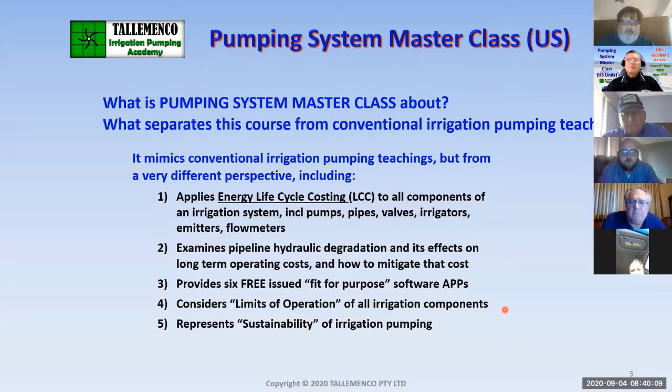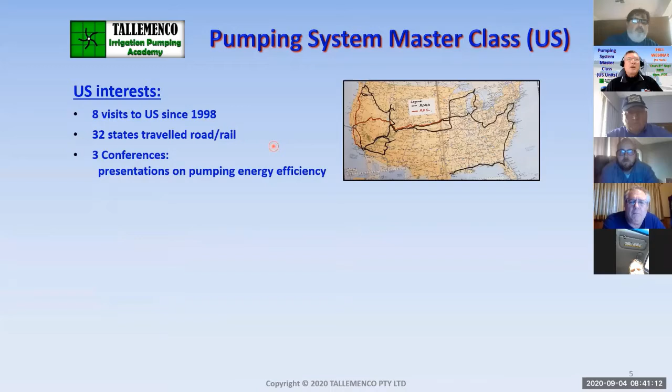I've been to the US 8 times since 1998, and I've also been to 3 conferences where I've presented papers on energy efficiency. First time in Seattle in 2017, and Long Beach, California, where I met Chris Wickman, and then last year in Vegas.

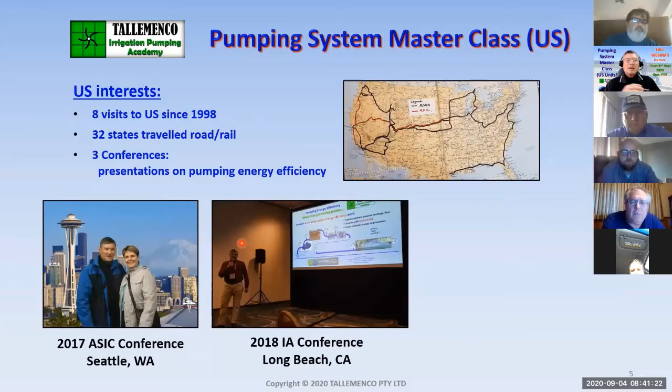What's my background? I have an associate diploma in mechanical engineering. I'm a certified irrigation agronomist, a certified irrigation auditor, landscape, and I have a certificate for training and assessment. I'm also HACCP certified, which is Hazard Analysis Critical Control Point for recycled water. I did a lot of recycled water in Queensland a few years back. And I live in Adelaide, South Australia.

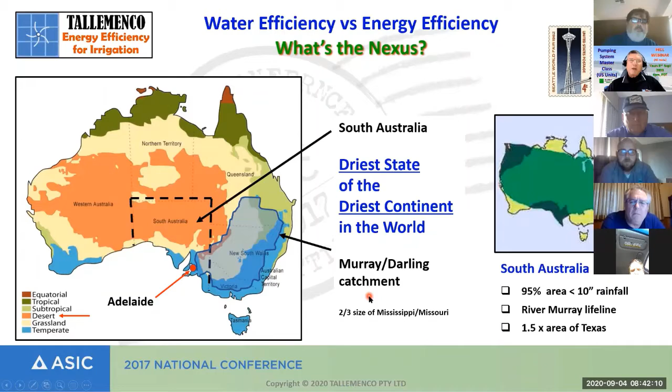Well, there's Adelaide, South Australia. It's the driest state of the driest continent in the world. We get most of our water from the River Murray, which in turn drains from the Murray-Darling catchment in the eastern states of Australia. In a dry year, Adelaide gets 90% of its water from the River Murray because it's so dry in our state.

I was fortunate enough in the very early 70s to be attached to the pumping engineer of South Australia's Water Supply Authority. That took me on a remarkable journey of testing and monitoring the energy efficiency of pumping plant and pipeline infrastructure throughout the whole state.

And because it's dry, there's a massive amount of pumping infrastructure here. So it's the knowledge from this background that I brought to the irrigation industry that makes my presentation so different from everybody else's.

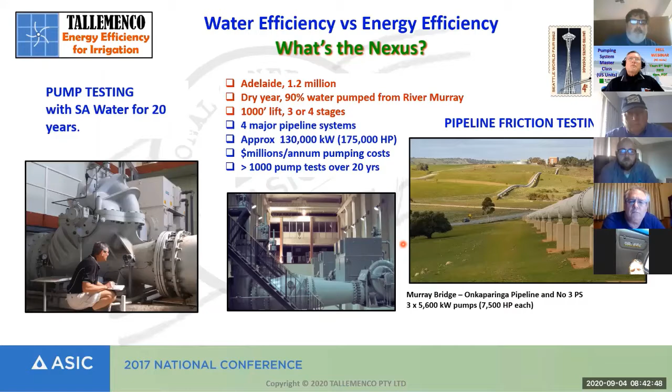Over the next several decades, I left the water supply company after 25 years and then got into the irrigation industry. I went out doing, as a consultant, audits and designs. So I got to see the best and the worst of the industry. And it was the worst of the industry that prompted me to write these training courses.

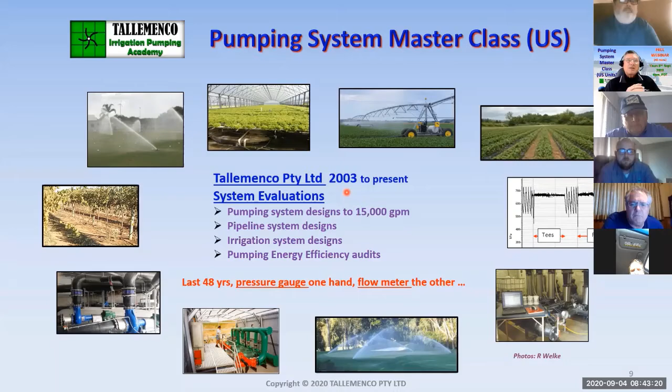One of the things I found in particular was the irrigation industry was so focused on the pump as far as energy efficiency. So if you want to do a pumping energy efficiency audit, you test the pump. In reality, if you want to do a pumping system energy efficiency audit, you test every component of the irrigation system, apply a head loss, measure a head loss, and then compare with best practice.

Well, they say best practice, but what is best practice? Often it's what the manufacturer might tell us. So we have to be a bit more critical of what is best practice. And that's one of the things that I look at in the training course.

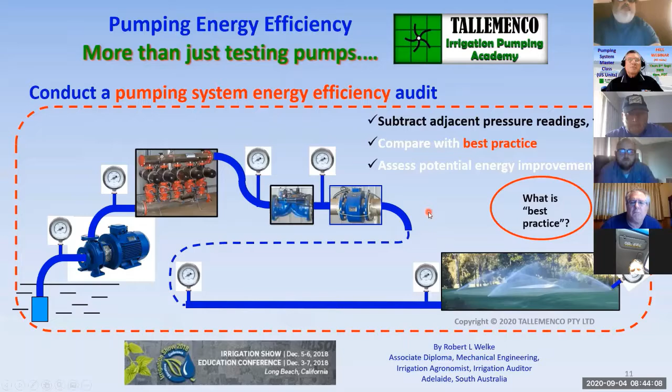So if we look at the components of where energy can be saved in an irrigation system, we have pump and motor efficiency over here, which is so heavily focused on in the industry. What I focus on more is the irrigation system itself, and look at the total head pumped and divide it up, and then look at where we can optimize and save energy.

And principally, it's in mains and sub-mains and lay flat hoses, pipe aging, pump suction, valves and filters. And because we can't see them, we often refer to that as the elephant in the room.

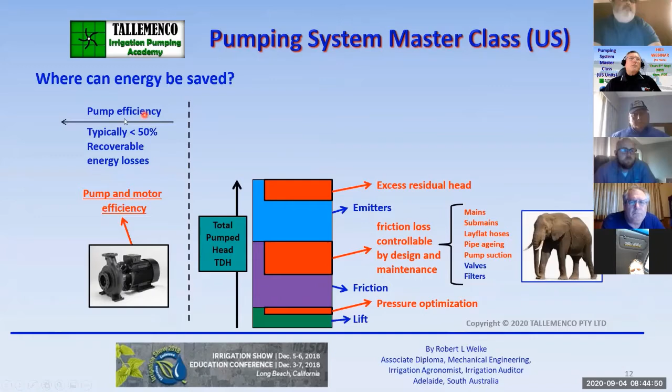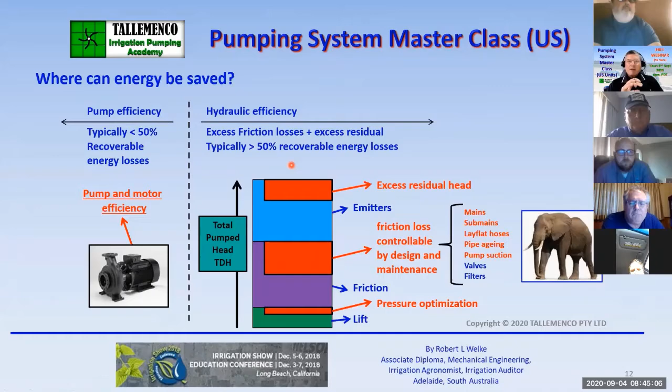So what component, when we look at energy savings, well, if we just look at the pump and assess the energy efficiency of a system, we could typically be looking at only less than 50% of recoverable energy losses. The rest is in the hydraulics. And this course really concentrates on the energy recovery from poor hydraulic systems.

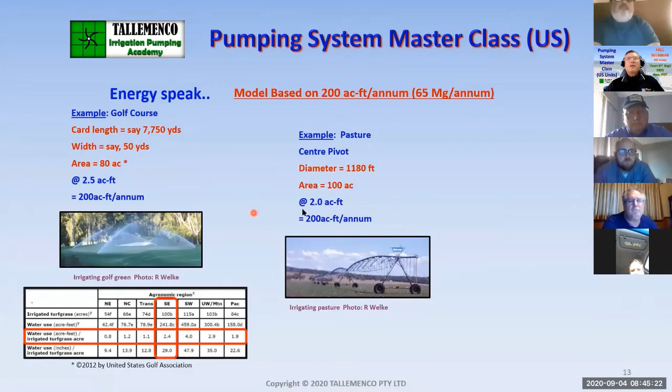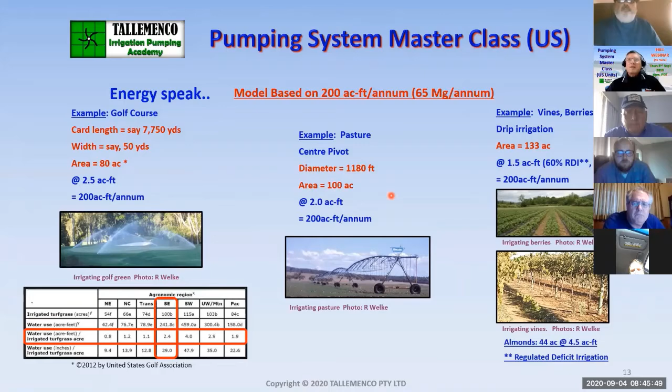As part of the system, it is based on a model of 200 acre-feet. So if, for example, a golf course, a center pivot, or a drip irrigation system, this enables people who attend the class to identify with a size of irrigation system. So they can say, oh yeah, you're talking about so many dollars lost here for a 200 acre-feet irrigation system. Mine's 400 acre-feet, so I've got twice the losses. It's a system of comparison.

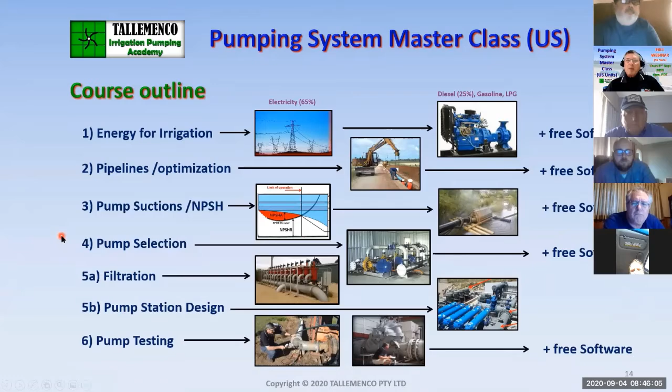The course looks at energy for irrigation, pipelines and optimization, pump suctions and NPSH, pump selection, filtration, pump station design, and pump testing. Pump testing is a fairly strong one, with lots of traps in pump testing.

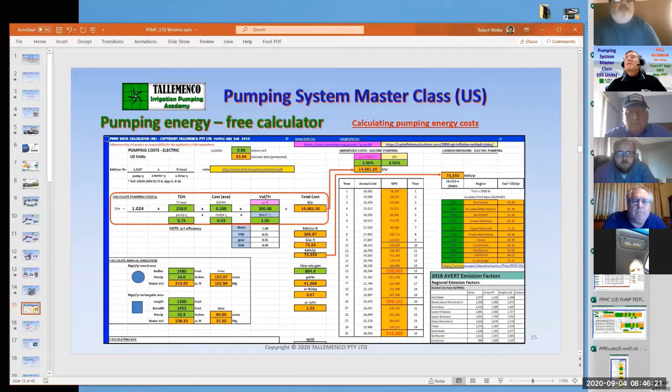One of the significant parts of the course is the software, and I'm going to deviate from here. This is the main software, the pump data calculator. So I'll bring this up here.

This takes the formula for calculating energy from the NRCS book. It's exactly the same that I use for metric, just a slightly different conversion factor. So it's a constant times the total dynamic head times the cost of electricity times the volume, divided by pump efficiency, motor efficiency, and drive efficiency. That finishes up in an annual cost from there, and that in turn goes through an amortization process where we amortize that annual cost over 15, 20, or 25 years.

I was doing a bit of a calculation here yesterday for a major potato grower in South Australia.

In addition to that, we look at carbon emissions. That probably won't come into your vocabulary on a regular day-to-day basis, but if you're looking at government schemes, they will almost invariably require you to assess the carbon emissions and carbon emission savings if you're doing any design or auditing work.

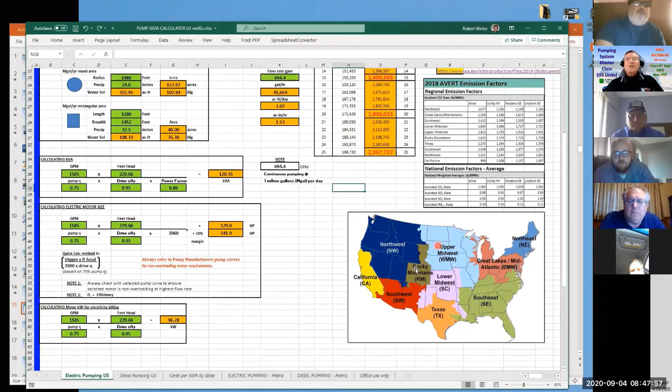This takes information from AVERT, which is a federal government website in the US, representing the energy zones that the US is divided into. So they calculate the tons of CO2 per year that an irrigation system will generate.

It also has a diesel component. If you're pumping with diesel, you can calculate the energy cost quite accurately. It takes the principal measurement from the engine manufacturer, which specifies the brake specific fuel consumption of a diesel, either in grams per kilowatt hour or pounds per horsepower hour, which you can select from a drop-down.

You can do both the electric and diesel systems, with a choice of acre inches, acre feet, 100 cubic feet, cubic meters, or million gallons as your input for the volume pumped per year.

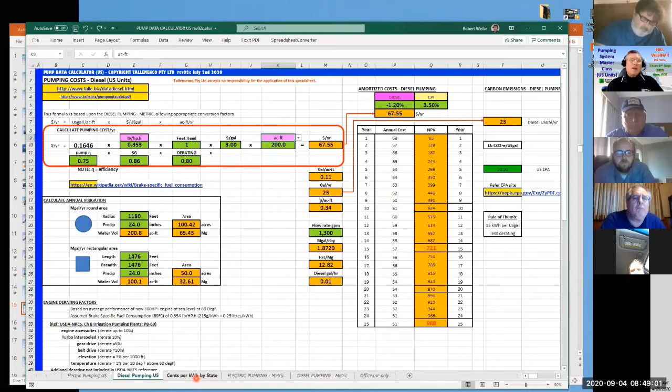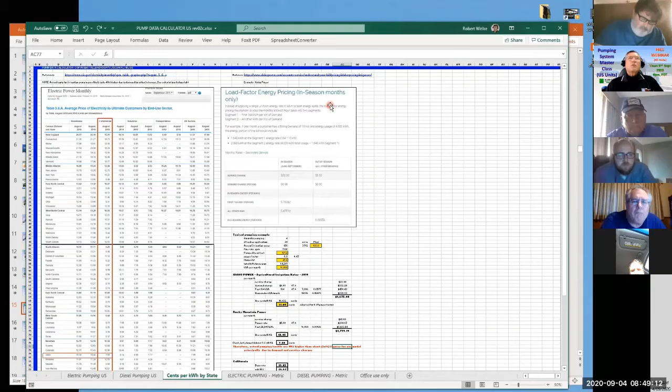It's got a breakdown of all the energy costs in cents per kilowatt hour throughout the whole of the United States, and that's been one of the guides I've had to assess.

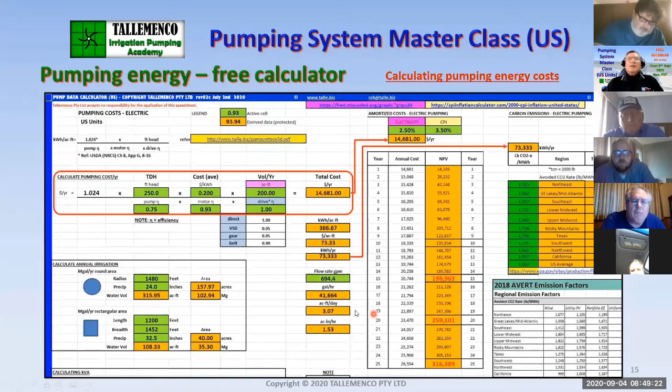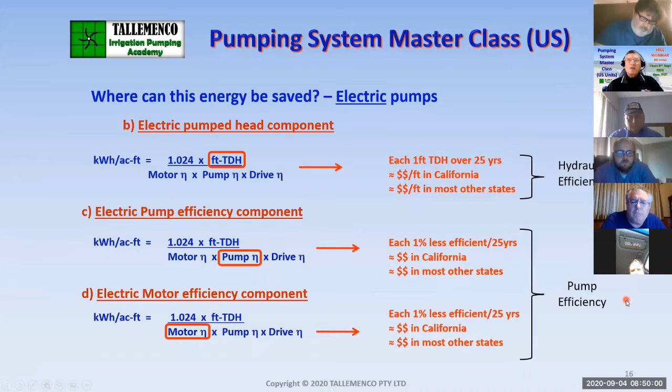Using this calculator, we can come up with things like kilowatt hours per acre-feet, and we can look at how much one foot of total dynamic head costs you over 25 years. I've divided this into California and the rest of the country. California has the dubious honor of having the most expensive energy in the country, almost twice as much as all the other states, so I've divided it up in that respect. That's a fascinating insight into how much it's costing you to operate any single device in your irrigation system.

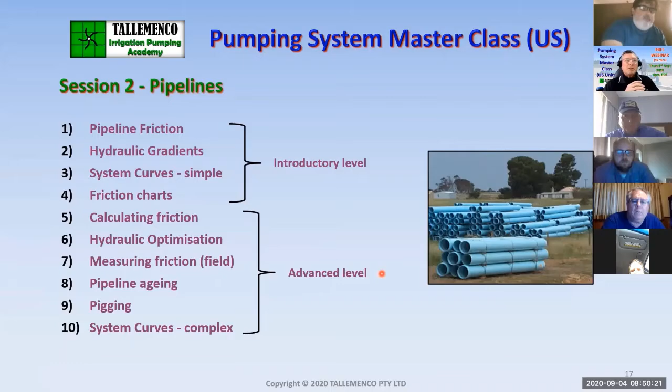For pipelines, we look at a whole heap of things, some pretty introductory level stuff, and then we get into calculating friction and hydraulic optimization, measuring friction in the field. It's an incredibly interesting activity, measuring friction and deriving the Hazen and Williams C factor.

One of the things we do is look at the Hazen-Williams equation versus Darcy-Weisbach. Hazen-Williams gives us a C factor that's often used in our irrigation industry. Darcy-Weisbach and the Manning's formula are similarly used more in industry, and they refer to the condition of a pipe in terms of its internal roughness.

So what I've done is combine the two and come up with a comparison, so we can tell a Hazen and Williams factor. As an example, 0.004 of an inch bore roughness inside a 3-inch pipe will reduce the Hazen and Williams C value from 150 to 130. Now you can't even see 0.004 of an inch, so how does that get there?

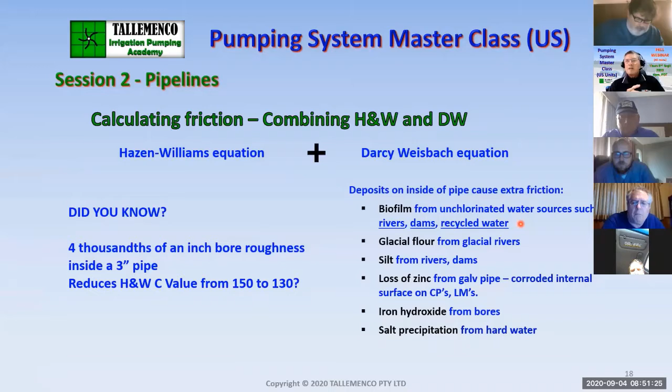It gets there from biofilm, from unchlorinated water sources such as rivers, dams, and recycled water, and that's all we pump with. What about glacial rivers? There's glacial flour in glacial rivers, silt from rivers and dams, loss of zinc from galvanized pipe, iron hydroxide, and salt precipitation. You've probably seen them all.

Hydraulic optimization. What's the optimum size of a pipe? As the pipe diameter goes up, the cost of laying a pipe goes up. But as you do that, the pipe friction goes down as the pipe diameter goes up, and the energy costs go down.

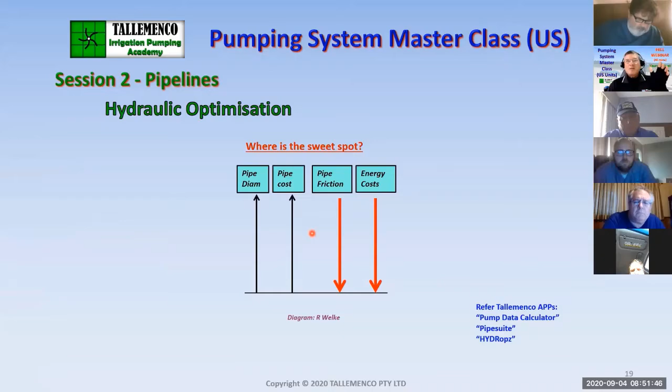So where's the sweet spot? We look at how to find the sweet spot. In fact, I've got an app just for that. Let's just look at that app briefly. I'll pull that app up, and we've got HYDRopz here.

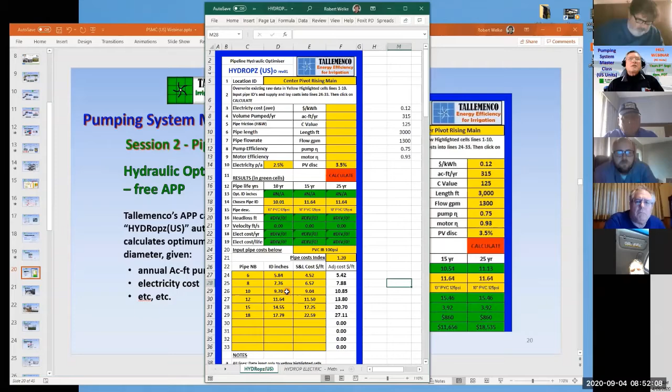So this is the app. We have a series of input data, including supply and lay costs, and we can input data here: 0.12, 315, 125 Hazen Williams, pipeline length of 3,000 feet, 1,300 gallons a minute, pump efficiency of 0.75, and motor efficiency of 0.93. These are all input factors, and from that it calculates the optimum diameter in inches over various pipe ages.

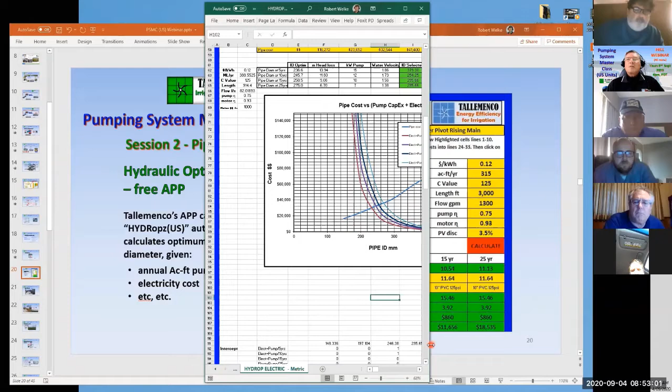So for a 25-year life, the optimum diameter for those set of inputs is 11.13 inch inside diameter. If you want to have a look at how that works, it refers to a graph in the back office where each of those ages is defined by a curve representing the change in capital cost versus the diameter of the pipe, and then it references the actual cost of supply and lay. Where those curves intersect, that's the value that we use.

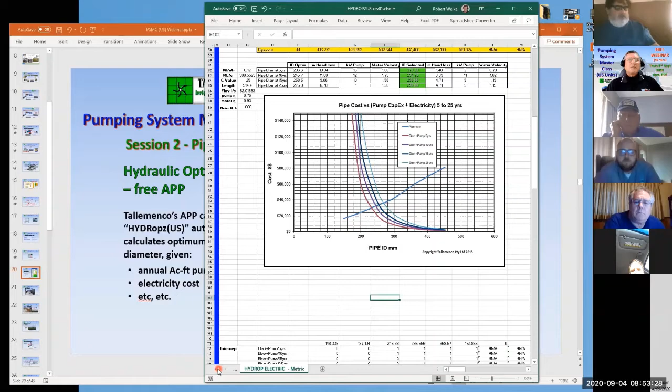So that's HYDROPZ. We'll just minimize him.

We look at pipeline pigging. That's a pretty important part. If you get into areas where you have silt, we can actually...

I don't think you've got sound on that, by the way. I forgot to activate the sound.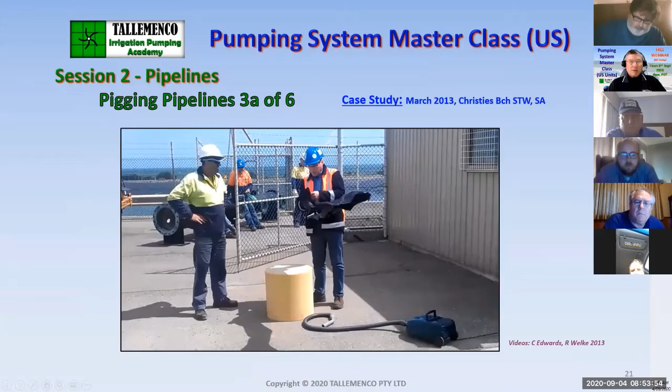So here's another pipeline pigging exercise where we sighted an instance of what was otherwise very clean water going to a lateral move, and we decided to pig the pipeline, and that's what we got out of it. Everybody was shocked. So there's all sorts of surprises when we start delving into the inside of pipelines.

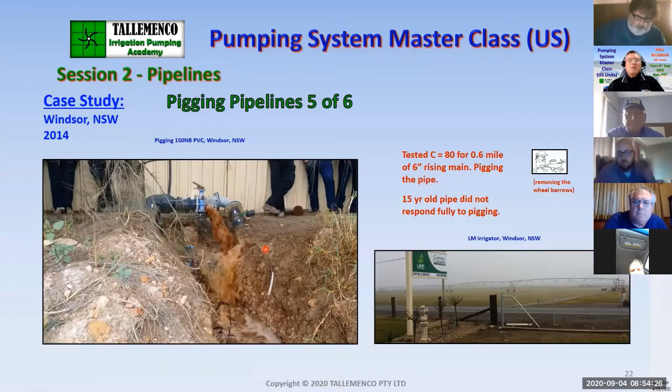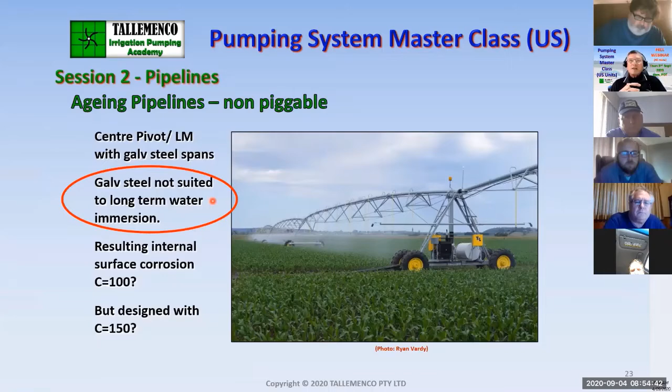Center pivots, there's lots of stories to be told about how they degrade over time, and what a mild form of galvanizing loss can do to a center pivot. We cover that as well.

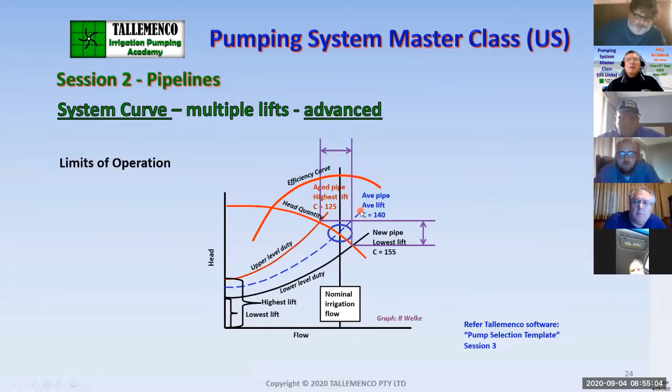So as far as limits of operation of a pipeline, we need to start to define, well, if pipelines can be so variable, we need to take into account the system curves when we design a pumping system. That's just an example of the limits of operation taken into account. We'll see that a little bit more later.

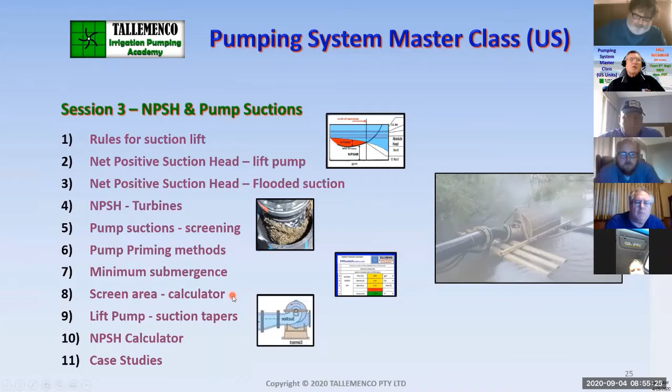NPSH, this is probably a bit more standard, but I've got an excellent graphical indication of how net positive suction head works. We look at minimum submergence, suction screening, and screen area calculator, and lots of case studies.

And this is the calculator for NPSH, the NPSH pump calculator here. So this is the NPSH required curve for a pump, and there's the feet and head. Normal maximum is 33.9 feet.

So we can put some figures in. I'll just show you how this works. If the best efficiency point is 1100 gallons a minute, the irrigation duty is 1300, we're going to maximum flow 1425 and a Hazen Williams value of 150, and that brings up a red line which defines the maximum NPSH available, which is 33.9 feet.

Then we go through and add a few figures, like we've got 3 feet of positive head, so that takes the NPSH available up 3 feet. Then we've got atmospheric pressure, that's 30.8, and that brings it down because we're elevated. We've got vapor pressure, 1 foot of vapor pressure brings it down. We've got 1.5 feet of margin, that brings it down even again.

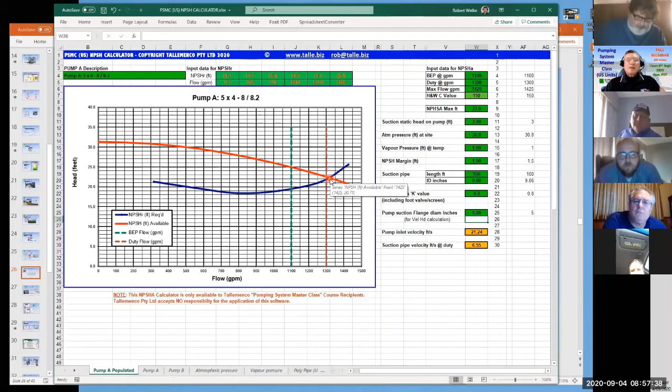This course is about limits of operation, and this enables you to see it graphically. So you can program this for any pump you like, and it's a fascinating and valuable piece of gear.

Then we get into pump selection. We'll look at some introductory stuff, and then go into one of the things: limits of duty of a pump. We've got the upper and lower limits of duty defined by the hydraulics, and that goes back to what we saw in the pipeline section.

Pressure sustaining valves, if there's any item in an irrigation system that sucks energy more than anything else, it's a pressure sustaining valve. We'll look at that. We'll look at pump guarantee limits for pumps. You go back to your HI 14.6 for this.

Pump materials and construction, we look at corrosion. Then we look at electric motors and VFDs in terms of efficiency. Then we do some typical pump selections: single flow, multiple flows, and multiple flows and heads.

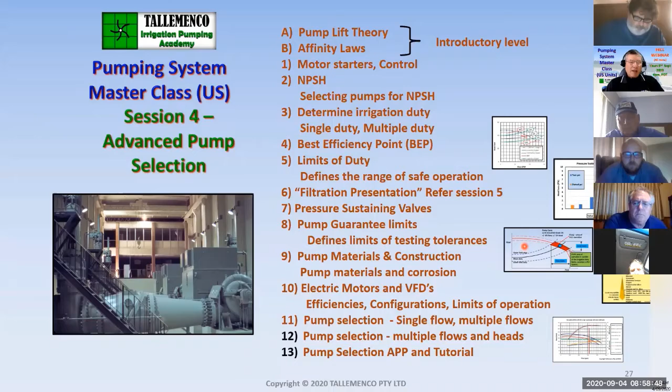And then we've got an app, I'll show you in a moment. All the curves and all the demonstration graphics are in gallons a minute, US gallons a minute, and feet head.

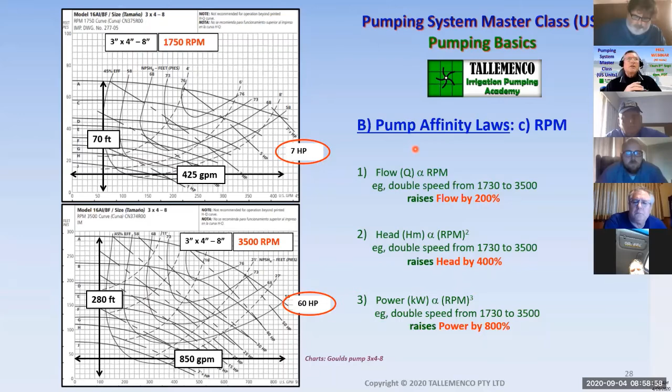What in reality happens is that we've got multiple system curves considering our limits of operation, and when we go to select the pump, we've actually got quite a wide band considering the pump testing tolerances from HI 14.6, and those tolerances are the same worldwide. All pump standards are the same worldwide: plus or minus 9% flow, plus or minus 7% head. So your pump selection goes from a single point to a very large area.

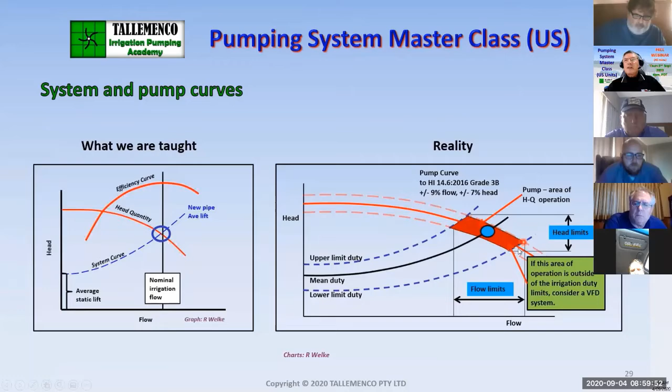How do you control that? This course deals with that. And then we go into the pump selection, pump duty selection. So we've selected some system curves, a range of system curves here for a particular center pivot selection.

And here's the pump. We've selected a pump duty with a little bit higher head, and we can manipulate this. Up here we've got the pump impeller diameter, and by selecting a lower impeller diameter, we can massage this to suit our requirements. So it might be 11.7, I don't know. So we've got to aim for this point here - that's the ultimate worst case duty of that pumping system.

It's interesting to note that the pump duty will require to operate over this range in the life of it, so we might consider a VSD. The other thing we can do in place of the RPM - we go 3000, sorry, 1750, and 1700. Because the affinity laws for an impeller are the same for the impeller diameter as the impeller speed, we can also substitute RPM into those figures.

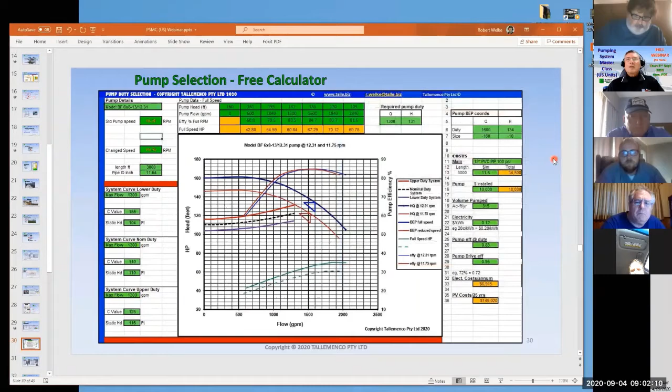I use that so often, it's just so powerful. Then we look at pump stations - a whole heap of things like power supplies, solar, the buildings, buoyancy, pipe work, electrical, occupational health and safety, particularly ladders, and documentation.

Then we go into filtration, and this is not about filtration - this is the cost of filtration, the energy costs. We look ultimately at a case study where after an audit I identified $9,000 per annum worth of electricity savings from reconfiguring how the filtration system was installed. That amounted to $166,000 over 15 years. That was for a large almond grower. I found out 4 years later that all these other farms along the River Murray had been changed similarly. We'll look at how that was changed.

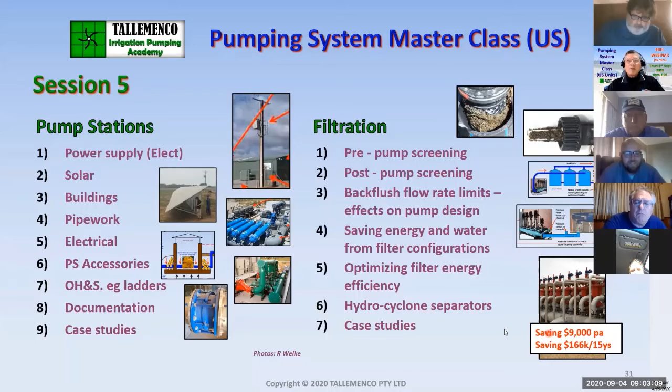Pump testing - we get back to the HI 14.6. We look at pump testing formula, how to measure head, what not to do, what sort of gauges to use. Then we're measuring flow - I always used to say the accuracy of pump testing is 90% measuring flow. If you don't get your flow right, you're wasting your time. So we look at flow meters and their accuracy, and there's some pretty ordinary flow meters out there. How to measure power - we look at the theory and then the practice, and then pump operating costs.

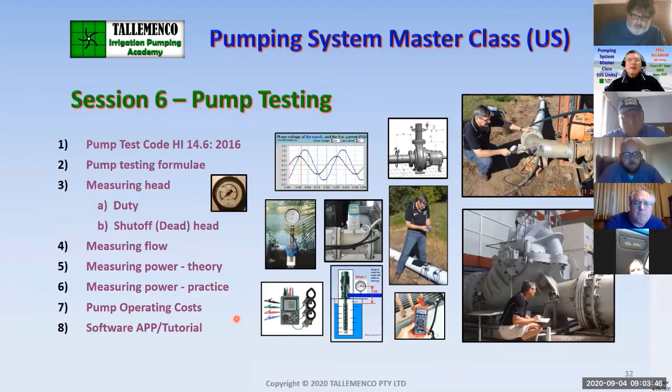And then we go into a pump testing app, and I'll just bring this one up briefly for you here. So no, it's not that one. It's the pump testing app down here.

So it's got all the input - you input your manufacturer's curve in there, and that may be a works test curve, or it may just be a catalog curve, in which case it's subject to ±7 and ±9%. So you've got to be really careful when you go to site. You'll probably never ever replicate the manufacturer's pump curve in a site test, and we'll learn why.

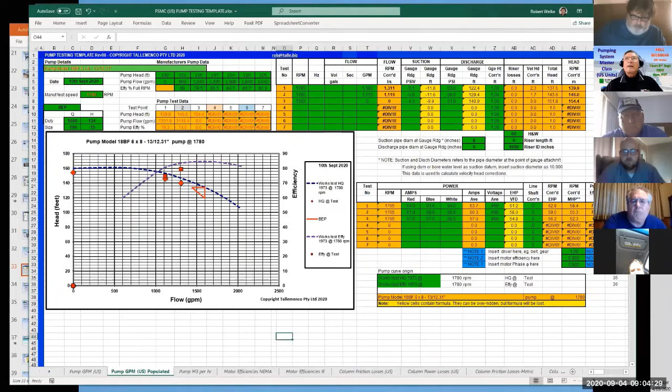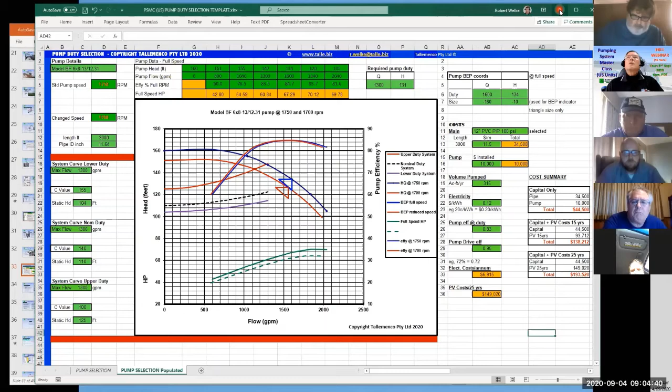Okay, so that's a brief expose of the software, most of the software. So how will this course help you?

Well, for a start, the software is extremely empowering. It puts you in charge, and for designers, it enables you to design energy efficient irrigation systems and not just select energy efficient pumps. So it does the whole deal.

For auditors, an essential companion. If you do any auditing of irrigation systems, these software are amazing. What about farm managers? To evaluate your farm energy efficiency and verify it, rectify it. Potentially save thousands of dollars in annual pumping costs and tens of thousands amortized costs.

One of the best things is you can justify a position with your client. If you're going to deliver a product selection for your client, you can justify what you've selected by bringing up this software on your computer and say, well, if you do this and this and this, it's going to cost you heaps extra, and that's probably what your opposition has done.

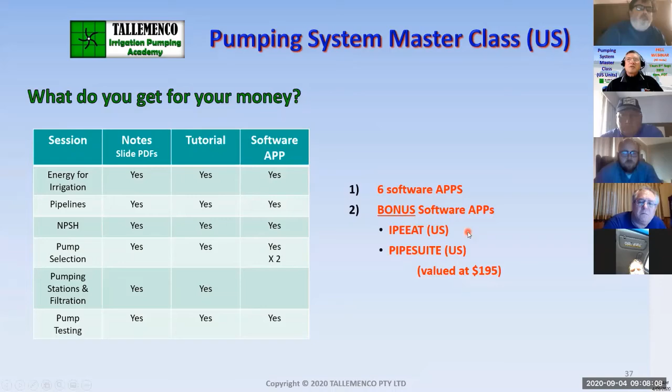In this particular case, we've got a couple of bonus software apps. One's called IPEEAT, one's called PIPEsuite. Here's IPEEAT, it stands for Irrigation Pumping Energy Efficiency Assessment Tool, and I'm going to bring this up.

IPEEAT Pro, IPEEAT US. This particular bit of software I designed after considering dozens and dozens of field audits, and I put together software that will predict the energy efficiency of your total system without even going to site.

So you just need a few things: first of all, what type of irrigation system is it? Whether it's a center pivot, lateral move, big gun, knocker rotor, drip spray, flood, transfer, pipe and riser. Each of those types of irrigation system has a unique hydraulic footprint, and you go to any similar ones, they are very similar. So I've been able to create algorithms for each that predict, given certain inputs, the outcome.

Given the residual pressure at the end of the system, the feet and elevation, the amount of water pumped per year, the kilowatt hours consumed, and the electricity cost.

And this is one particular one. This was the one where the really dirty water was coming out of the pigging exercise. The potential electricity savings on that particular scheme was 56%, so that was more than half. This guy had the potential to more than half his electricity costs.

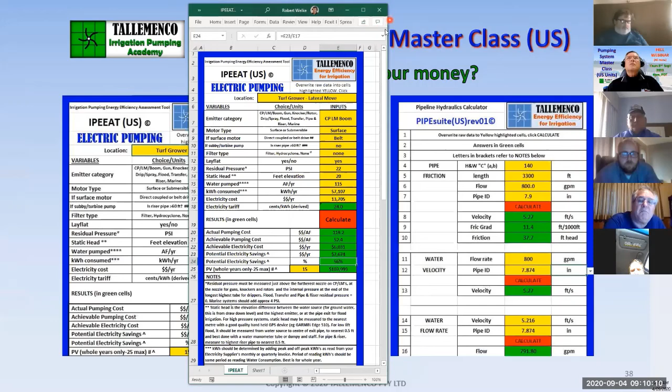And there is, I'll just minimize that. How do I get, I can take that over there. I can go here, there's a video you can watch when you receive this. That's one of the first videos I made, going back a few years. So we'll just leave that one alone.

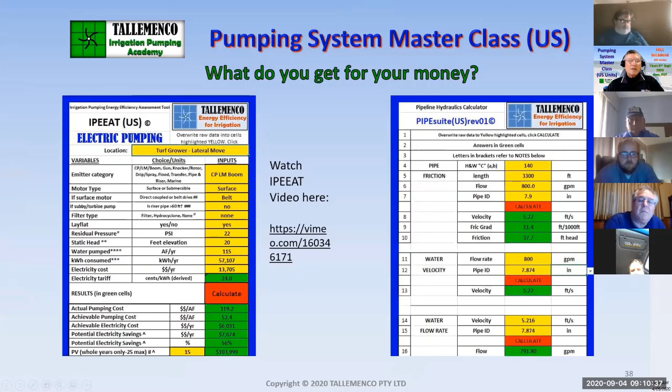That video is on my website.